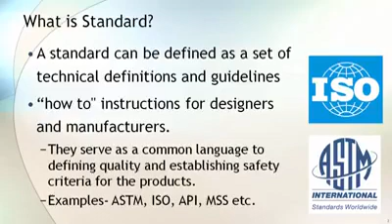ASTM, API, MSS, ISO are some of the examples of standards. ASTM has more than 12,000 standards. They cover almost everything. If you visit the ASTM website, they say they have a standard from toy to aircraft.

Why are standards required? Let's take an example of a mobile phone travel charger. If you are in the US and traveling to India, you need an adapter to use this charger in India, as both countries follow different standards for power sockets. But your USB cable will work anywhere in the world because it is manufactured as per a globally accepted standard.

In case of process industry, we want all the piping material, irrespective of their country of origin, to fit perfectly with each other when they come to the site. Standard helps to achieve this by establishing engineering or technical requirements for product, practice, method or operation. Standard builds confidence about product quality in the users. With standardization, cost of production will reduce as you can produce in bulk for a global market.

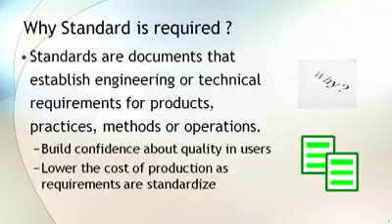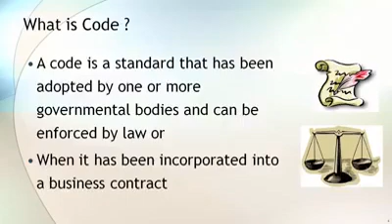When a standard is adopted by a government body and becomes legally enforceable, or when it has been incorporated into a business contract, the standard will become a code. ASME codes are legally enforceable in many US states, whereas other parts of the world have their own similar codes. Please note that the requirements mentioned in the code will only be mandatory if the code is adopted as a law by a regulatory body or if it is part of a business contract. Otherwise, code will serve as globally accepted guidelines for design, fabrication, construction and installation.

However, almost all process facilities follow various American codes and standards in addition to their national standard. Some examples of codes are ASME Boiler and Pressure Vessel Code, British Standard, DIN, Indian Standard, etc. DIN is a German national standard.

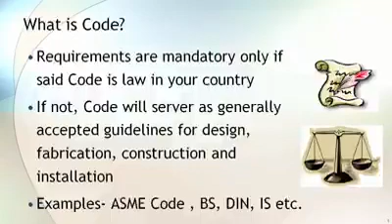Why is code required? Code provides a set of rules that specify the minimum acceptable level of safety and quality for manufactured, fabricated or constructed goods. It also refers to a standard or specification for specific details or additional requirements that are not specified in the code itself.

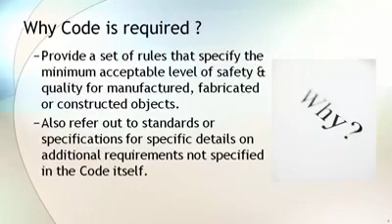What is specification? Specification provides specific additional requirements for the material, components or service that are beyond the code or standard requirements. For example, if you want A106 Grade B pipe with maximum carbon of 0.23% against the standard requirement of 0.3% max, you have to specify your requirement in your specification or in a purchase order. Specifications are generally generated by private companies to address additional requirements applicable to specific products or services.

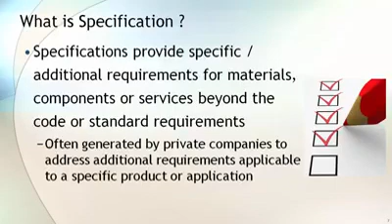Why is specification required? Specification allows the purchaser to include special requirements as per the design and service condition. It allows you to customize your product. Please note, requirements in a specification are must-meet requirements.

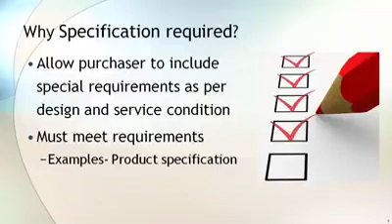To simplify understanding of code and standard, I have grouped them in 3 categories. First is system design code. This category of code provides entire system design requirements. ASME B31 series and ASME Section 8 are some examples of system design code.

Second is the material standard that provides standard material grades that can be used in manufacturing of piping components or any other systems. ASTM Section 1, Section 2 and ASME Section 2 cover various acceptable material grades that can be used in a system design. The last on the list is dimensional standard. Dimensional requirements of standard piping components are covered in various dimensional standards. ASME B16 series is an example of dimensional standards.

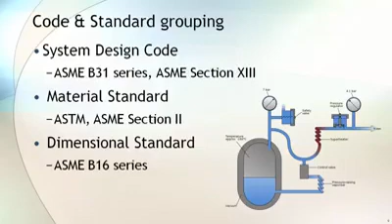To construct a safe and reliable process plant, you will require all 3 categories of code and standard during design, fabrication, construction and installation. System design code covers requirements for material that can be used in various process conditions, different types of components that can be used, how to design the system, how to fabricate, assemble and installation requirements, and it also covers the inspection and testing requirements for the entire system.

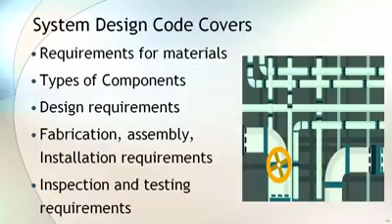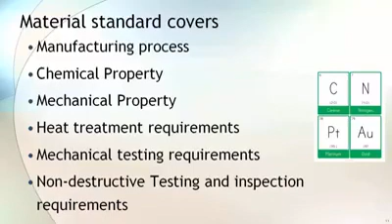Material standard covers the manufacturing process of raw material and the finished product. Material standard also gives the requirements for chemical and mechanical properties required in the finished product. It also suggests various heat treatments to be performed during manufacturing of the product. Material standard also gives the requirements for mechanical testing, non-destructive testing and various inspection methods to be performed during inspection of the product.

Material standard also gives the various acceptable tolerances of imperfection. When an imperfection is beyond the acceptable limit, it is known as a defect. Standard covers various defect repair methods and acceptance of that defect repair. Standard also gives the various marking requirements. Material standard also lists various supplementary requirements. These are additional requirements mentioned within the standard. The purchaser has to specify in his purchase order if he wants to add these requirements.

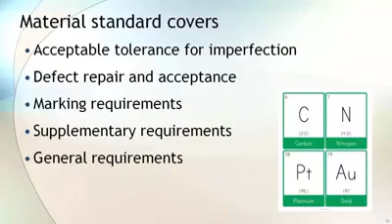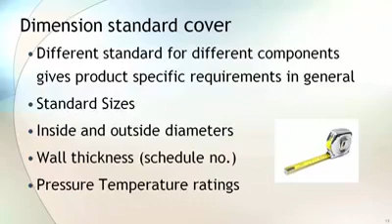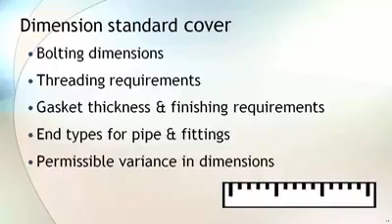Different dimension standards are used for different components. This standard gives product specific requirements. In general, dimension standard provides size, inside-outside diameter, wall thickness, pressure temperature rating. For flanges, it also provides bolt hole diameter, various bolting requirements, threading requirements, gasket thickness and finishing requirements, and different types of ends for pipe and pipe fittings. Dimension standard also lists various permissible variations that are acceptable within the dimension requirement.

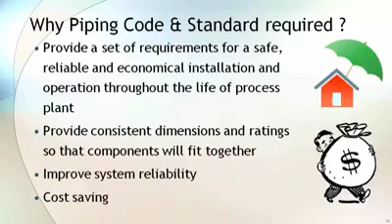Why are piping code and standard required? These standards provide a set of requirements for safe, reliable and economical installation and operation of the process plant. Code and standard ensure consistent dimension and rating so that components will fit together and improve system reliability. With standard components, less inventory is required and that saves cost also.

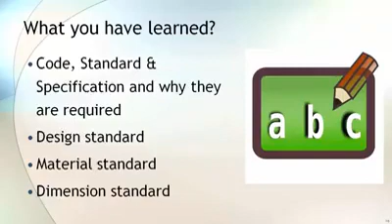Let's summarize what you have learned in this lecture. You learned about code, standard and specification and why they are required, and also about design standard, material standard and dimension standard, and what these three categories of standard cover. Refer to the resource section of this lecture to have a look at applicable codes and standards used in process industry.